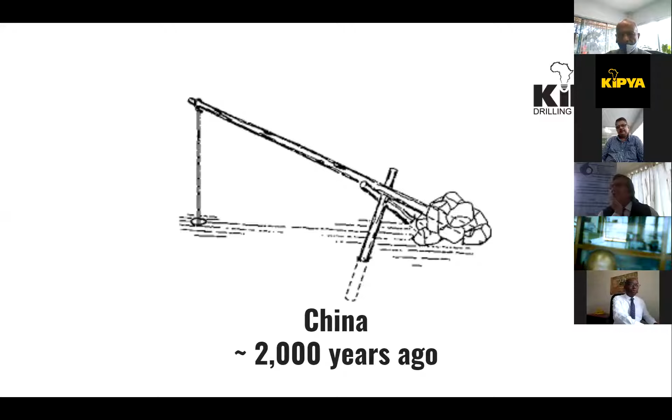Let us look at what happened 200 years ago in the UK. The picture you see there is from a company called Dando, a company in the UK that started drilling what they called tube wells in England to supply clean water after a cholera outbreak. Dando is very much in business today. Interestingly, 150 years ago, Dando were in Ethiopia as a drilling contractor in what was called Abyssinia, drilling tube wells, what are now known as boreholes, water boreholes.

Also at that time, a company in England called Ruston and a company in the US called Bucyrus partnered together, forming what is called Ruston Bucyrus Limited, to start manufacturing simple cable tool rigs. They took their principle from the beam that we saw earlier in the Chinese image. They then applied a mast, and using this beam and mast concept, with the advent of steam engines and then petrol-driven engines, they put together what is known as a cable tool drilling rig. As you can see in the image, there is a cable that's going right above the crown at the top and down the mast—initially from sisal, then from steel, and then variations of cable with a core made from sisal rope and a steel outside.

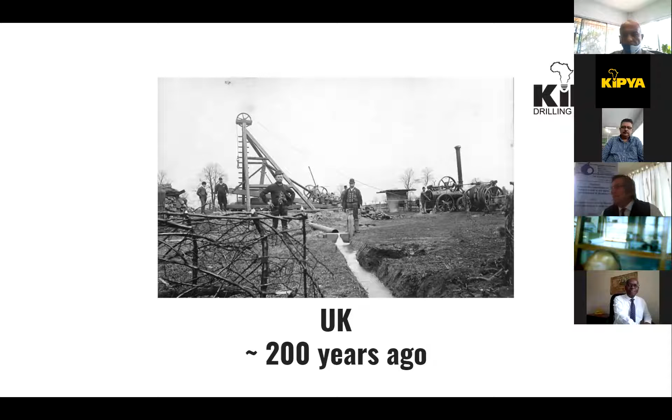In the US, there was the Ruston Bucyrus company. There were also other companies like Schmidt and Company who manufactured their own rigs at home. The rig you see in the image, made in the US 100 years ago, was manufactured by a Mr. Schmidt using the chassis from his vehicle. You can see that the traditional form of the mast is very much in use even today—note the profile of the mast.

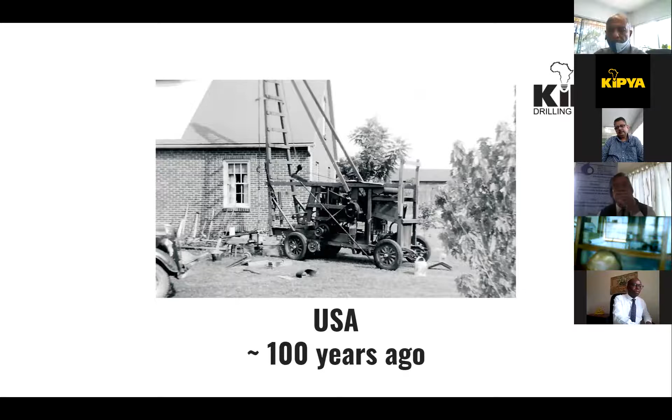Then, 70 years ago, Ruston Bucyrus company decided to put the cable tool drilling rig on a classic Bedford truck. A number of you will recall the good old Bedford trucks. I think there may be one or two still operating in Kenya. These are reliable machines, but the beauty is that it was far better to use these trucks because of things like ground clearance. It gave the opportunity for these drillers to go into areas that were not easily accessible, as the truck could get in. The other thing was that as the rigs started becoming bigger, it required a bigger truck or vehicle because of the tonnage, the weight, and the spread of that weight, and regulations in relation to axle loads on roads.

This cable tool rig was then quickly followed on by hydraulic rigs. The advent of hydraulic rigs brought on rotary heads, and these rotary heads would drive rods, and at the end of that drilling rod there would be tricone bits. These tricone bits used drilling mud, a process adapted from the oil and gas industry. Companies that were in this hydraulic rig manufacturing business are well known: Dando in the UK, Craelius, which was later acquired by Atlas Copco in Sweden, Gefco and Schramm in the USA.

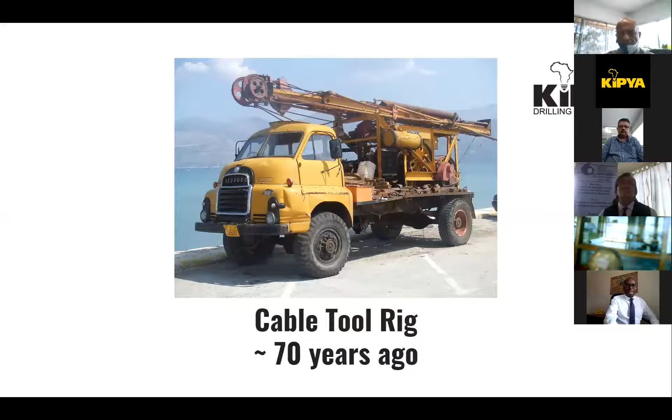So now let's come back to Kenya and observe what was happening in Kenya. In Kenya, the cable tool drilling rig had been brought in by companies like Craelius Terratest, eventually acquired by companies like Kenya Drilling Limited, also used by drillers like JB Drilling, and welcome to Tom Armstrong, who's with us today. These companies took on the cable tool drilling rigs but also started to upgrade because of productivity requirements. One of the very big hydraulic drilling rigs that initially came to Kenya was by a company called Mowlem Construction from the UK.

But indigenously, we note the period 1998, 1999, where there was an inflection point in the acquisition of hydraulically driven rigs. One of them is shown in the picture on this slide, from Spar Drilling, and they're still with us today - welcome very much, Spar Drilling, to this meeting. That rig of theirs, the first rig, was sold by a gentleman called Parathamana. And Parathamana is the gentleman who then led to the Parathaman Rock Drilling Company, PRD, as we know it today.

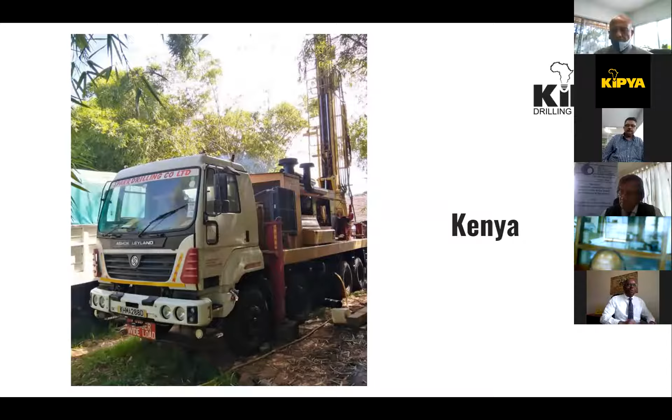All these things, like all other mechanical things, require maintenance, and maintenance is key. For example, you need the right compressor. You need the right maintenance schedule so that you can get the best life out of your drilling equipment.

Let us switch gears, ladies and gentlemen, and look at some statistics. Now, remember we said back in the day a 200-meter well took 10 years, and then that reduced to 6 months, and then with cable tool drilling to 3 months. And this is just averages, because we are looking at a consolidated formation, 200 meters, so these are just averages. But what we see globally is that the penetration rate in meters per hour had an inflection point when hydraulic rigs were introduced into the market. You can see there, from about 1970 on the graph, there's this sharp inflection, and then there's an acceleration in terms of the penetration rates.

So it's not a surprise today to get averages of 20 meters per hour drilling. This is very achievable. I think one of the key questions we will be asking ourselves today is: is faster drilling better drilling? And what are the trade-offs? What do we have to compromise in order to get a long-term productivity from these water wells?

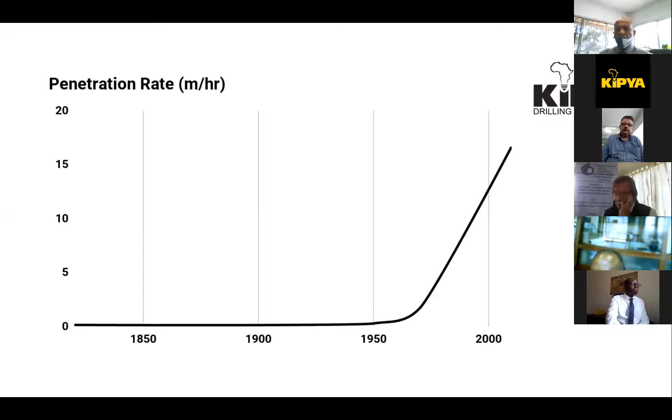Note, this gantry system is no longer installed in the majority of new boreholes. Why? Instead of using chain blocks placed on these gantries, now we have mechanical hoists. You are all familiar with the land cruisers that have long been used for mechanical hoisting, for the installation and removal of submersible pumps, cables, and the associated riser pipes.

And now we have the hydraulic hoists. As the wells become deeper, the pullback force needed to bring out these pumps is much larger, so much bigger, more efficient hydraulic hoists have come into use.

It's just a number, add years to it. Now that's the game changer. 88 years is a long time to be doing something. It's even longer when you've been doing it right. Hard work pays. Integrity is fundamental, but attitude is everything. Roll up your sleeves, get your hands dirty, sweat, whatever it takes to get the job done. No compromise, no excuses, no shortcuts. Dedication is everything, dedication to a single dream, a dream to build homes, a better country, a better future. This is our dream, this is Doshi. Our steel built this nation, our cables connect your cities, we build your homes. And now, a single goal unites us to bring you the most precious resource, water, the very essence of life. It needs to be protected, preserved, and pure. Using rapid technology and solid global partnerships, we're making sure that every drop of water gets to you uncompromised. Safe, clean water for all. This is what we believe in, and this is what we stand for. Our roots run deep, and so does our commitment. We are Doshi, we are Kenyan. 88 years, we've always been here, and we intend to stay. Built right from the start.

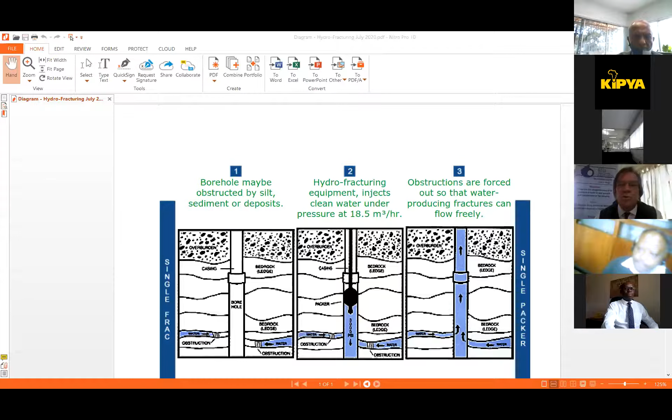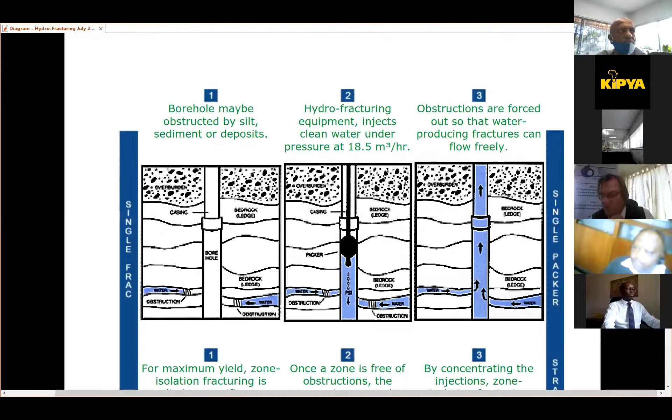On that point, I'd like to go back to this diagram, which explains a little about what hydrofracturing is all about. But I would like to reflect on what was said earlier in this context, where faster drilling equals better drilling - this is not the case. What can happen with faster drilling and high pressure drilling is that the cuttings can be pushed into the fractures and fissures, actually reducing the bore and reducing the yield.

We've had experience of this where the worst case was a driller engaged to drill three boreholes. He did those three boreholes virtually overnight, down to 180 meters in one day, and declared to the client that the three boreholes were dry. This wasn't the fact that they were dry - it was just that he had blocked off the aquifer. The end of that story was a good one, because we subsequently came with a cable rig, drilled them slowly, and got the water back, very high yielding.

Related to that, on this diagram you can see we've illustrated what may be fractures and fissures bringing water into the borehole. The procedure here is you come in with packers, and the first three diagrams show putting in a single packer. You introduce the packer, then introduce high pressure water into the borehole, going up to 200 bar. As the pressure increases, suddenly you get what's known as a breakthrough - that's where you've pushed out all the cuttings blocking the fractures or fissures. You push them out, and now the water you're putting in under pressure has gone into the aquifer.

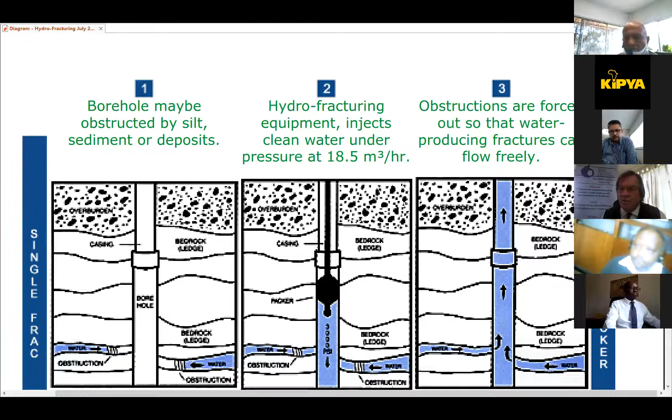If it can go one way, then it comes the other way, and it comes back with a lot more of it. If we can move down with the diagram, Daktari, we're now looking at the lower illustrations - this is now a double packer system, whereby you've sealed off the borehole above and below a certain fracture that you're looking to hydrofrac.

This can be identified by camera work before you start. It's just focused on a particular zone, and then you move over and go to the other zone, and basically you're opening up the fractures and the fissures.

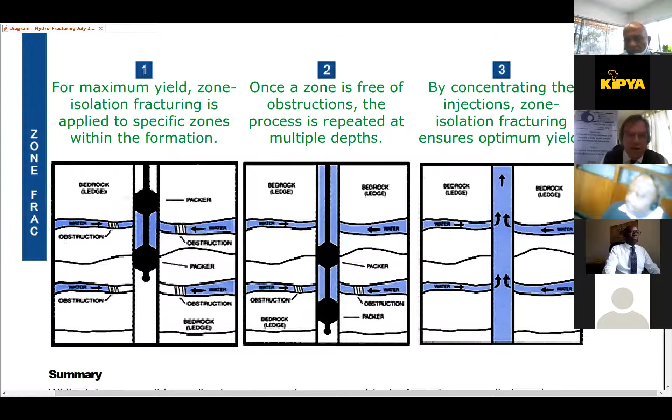I'm going to use an example of a contractor in the US in the four northwestern states: Montana, Washington, Idaho. He's kept very meticulous records of drilling and hydrofracturing, and he's recorded an average increase in yield of 584% since 1986.

That's really 95% of the holes that are fracked will improve yield.

There was a project in the 1990s in Uganda, a Danish funded project, where 3,000 boreholes were hydrofracked. They had two hydrofracking machines, applied over 4 years, and improved the yield on those 3,000 boreholes.

The regrettable thing is that when the foreign assistance closed, the project closed. So that machinery went to scrap, and some of it has been purchased by another driller in Kenya, one of our members. But again, it's not being applied.

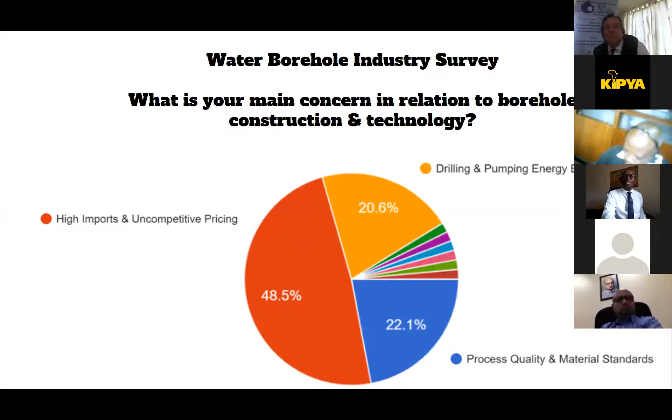Karibu sana. Gerald Wanjohi is the business manager for Water Well in East Africa for Epiroc. Gerald, one of the major operational costs of borehole construction is the energy cost—that is, the fuel consumed for pneumatic or air drilling, in addition to the fuel required for running the hydraulics. Please tell us, what are some of the modern features on a drilling rig that investors should consider in relation to energy efficiency, and are those features relevant for our market? Further, what would be the prerequisites in this country to start powering borehole drilling equipment with other energy technologies apart from diesel? Karibu sana, Bwana Wanjohi.

88. It's just a number. Add years to it, now that's the game changer. 88 years is a long time to be doing something. It's even longer when you've been doing it right. Hard work pays. Integrity is fundamental, but attitude is everything. Roll up your sleeves, get your hands dirty, sweat, whatever it takes to get the job done. No compromise, no excuses, no shortcuts. Dedication is everything, dedication to a single dream, a dream to build better homes, a better country, a better future. This is our dream. This is Doshi. Our steel built this nation, our cables connect your cities, we build your homes. And now, a single goal unites us to bring you the most precious resource, water, the very essence of life. It needs to be protected, preserved, and it needs to be pure. Using rapid technology, solid global partnerships, we're making sure that every drop of water gets to you uncompromised. Safe, clean water for all. This is what we believe in, and this is what we stand for. Our roots run deep, and so does our commitment. We are Doshi, we are Kenyan. 88 years, we've always been here, and we intend to stay. Built right from the start.